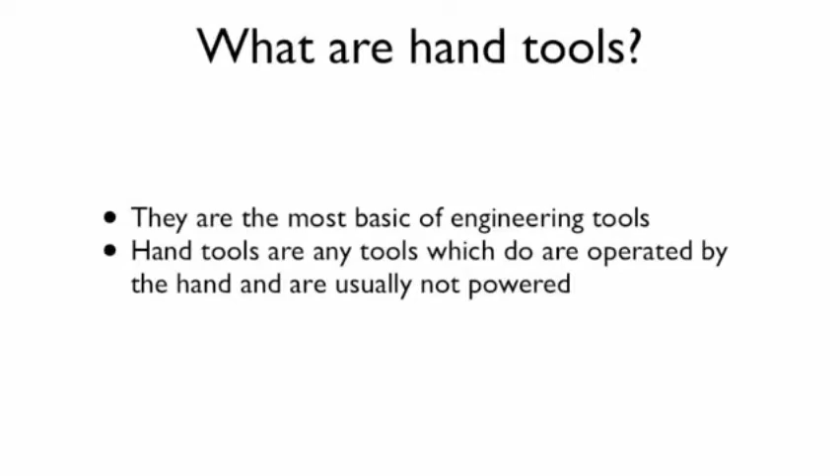Important operations. So hand tools, what are they? They're the most basic engineering tools. Anything you would use to build a design is basically a hand tool. Usually they're operated solely by your hands, but sometimes they can be powered. Usually hand tools are small devices as well. And always remember, safety is top priority. You can hurt yourself just as much using a hand tool as you can using a larger manufacturing tool.

So let's talk about many different types of tools. I'm going to start with pliers. Pliers are one of the most useful tools you'll use because they enhance gripping potential. There are some places we maybe aren't able to get to very easily, or we just don't have enough power to grab onto these places.

The first plier I want to look at is a long nose plier. Long nose pliers are extremely convenient for getting into narrow spaces where a hand simply can't fit, and also provide some extra gripping power and rigidity for grabbing certain devices. Also notice that near the pin joint of a long nose plier is a small black gap. This is often built into the long nose pliers as a cutting device used to cut wire.

The next type of plier is called a slip joint plier. A slip joint plier basically has a pin in the center, in the same place a long nose plier would between the handles and the actual jaws, but this allows the jaws of the pliers to spread out and fit to different surfaces. It's very similar to a channel lock plier. Essentially a channel lock plier is a type of slip joint plier, except it has bigger jaws, a little different orientation on how the tool is put together, and it can spread the jaws at a wider angle and wider distance apart.

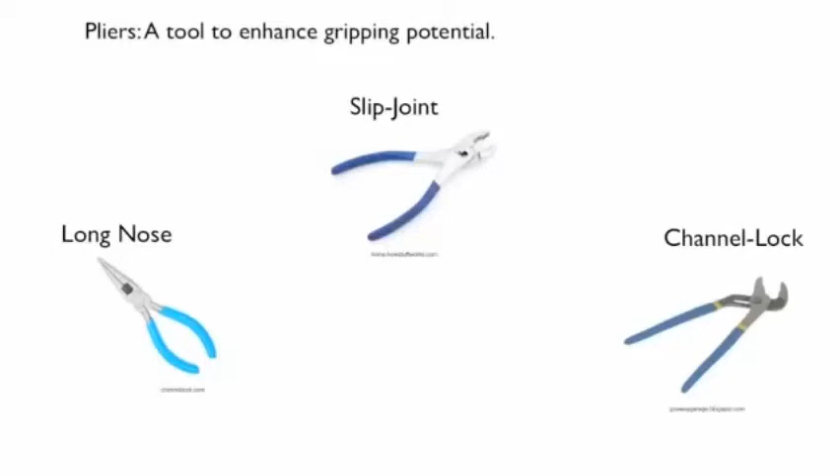There are many other types of pliers, but these are just some of the basic ones you should be familiar with. The second type of tool we're going to look at are called vice grips.

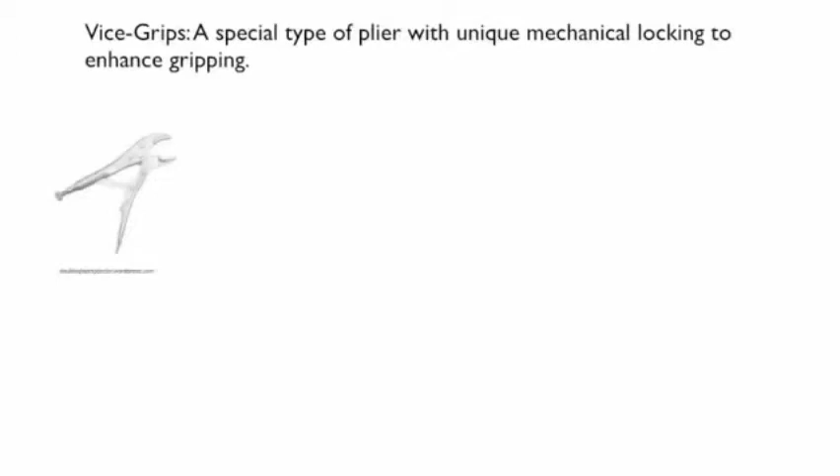Vice grips are a very unique type of plier. The main difference is vice grips have a certain mechanical advantage. If you look at the picture to the left, it shows vice grips in an open position. The next picture shows the vice grips in a closed position. The advantage of vice grips is you can adjust them using the small round screw, as you can see on the vice grips, to be able to clamp onto a material.

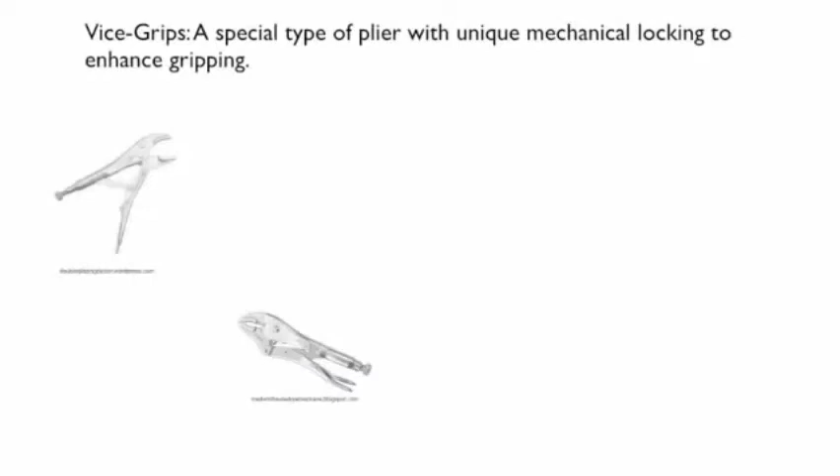And the nice thing about them is they will lock in place, making it so your hand doesn't have to provide a mechanical force to actually grip a tool. Vice grips come in many different shapes and sizes. Unlike the size you see to the left, where it has jaws with teeth, you can see vice grips with small flat surfaces to get around other objects but still make a pinching force.

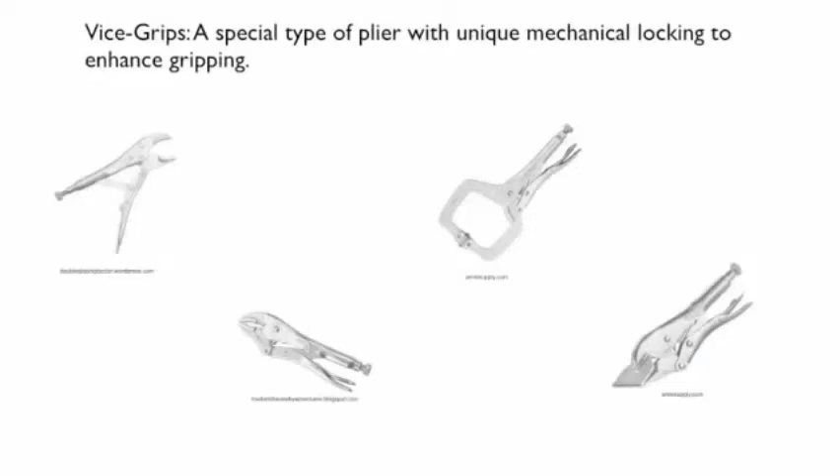And you can see sometimes jaws or vice grips with flat surfaces, as the one shown to the right. This kind of vice grip is useful for large flat areas of metal, or even if metal has been bent, these are very useful for flattening out that piece of metal as well.

The next tool we're going to look at are files, and specifically when we're working in the machine shop, we're dealing with metal files. You can see many examples of files on the left-hand side of the screen here. They come in a variety of different cross-sections depending on the operation you want to perform. But basically all files work about the same.

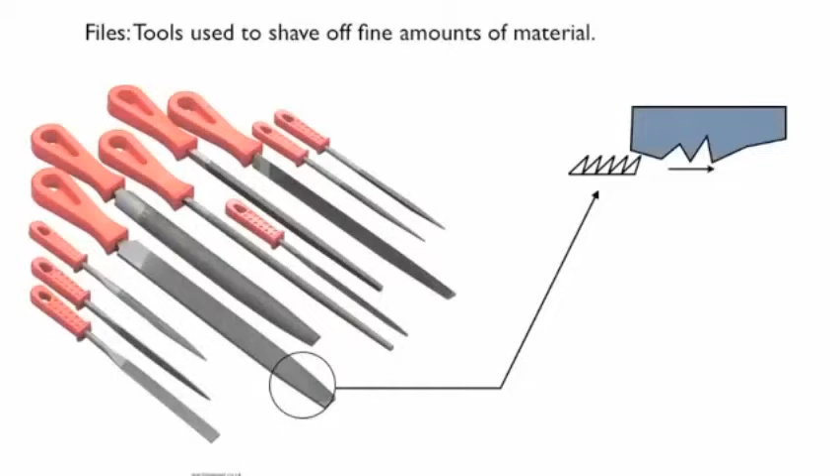If we look at the surface of the file, it has a fairly sharp surface pointed in one direction. If we're actually going to do a filing procedure, say for example we have a rough surface, we simply move the file in one direction along the surface and it smooths the surface out. Then, instead of going back on the surface, we bring the file back to the beginning of the surface and repeat the procedure again, each time removing more and more material.

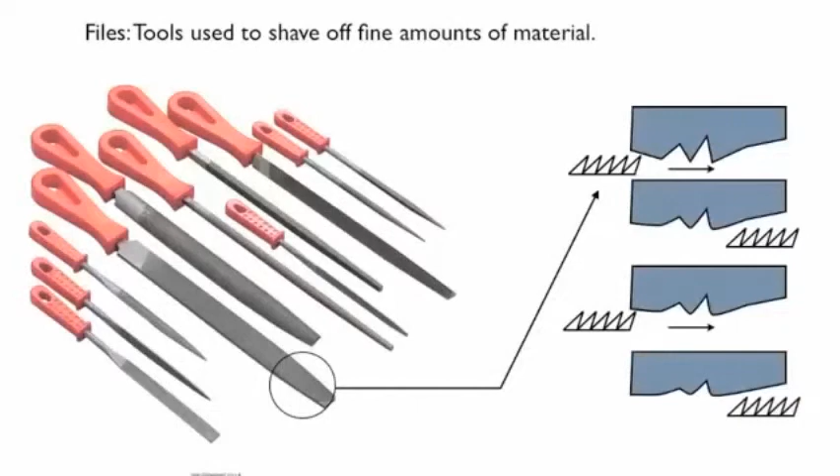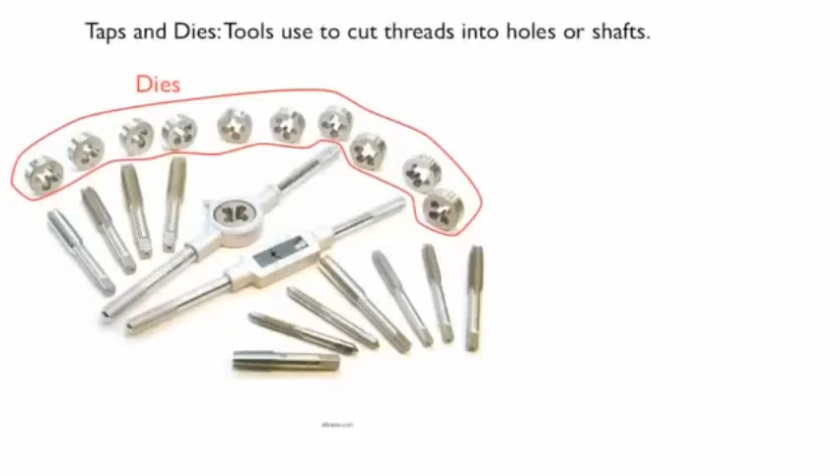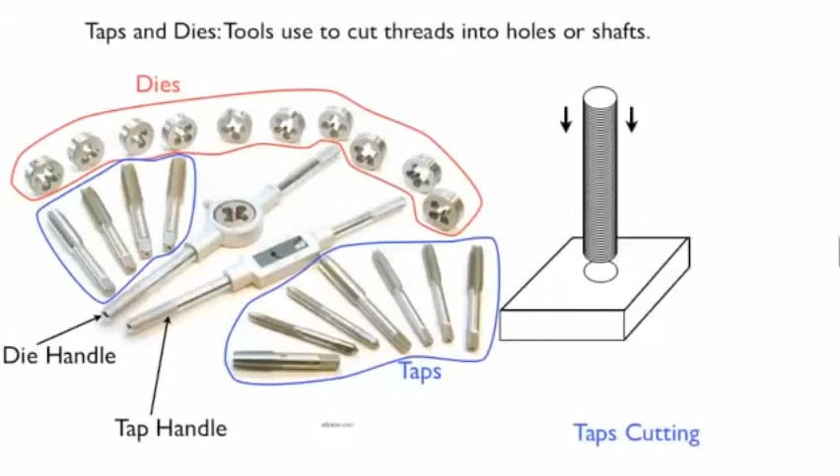And as we keep rotating around and move all the way down the post, we get a cut thread from the die. Taps work similarly in that they cut threads, but with a tap, we put a surface with a thread in it into a hole, and rotate it around, cutting threads the opposite way. Theoretically, you can take one member cut with a die and another cut with a tap, and mate them together.

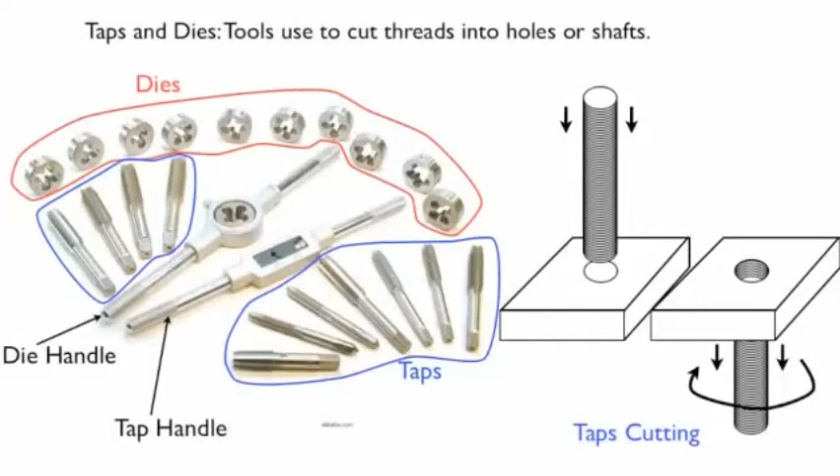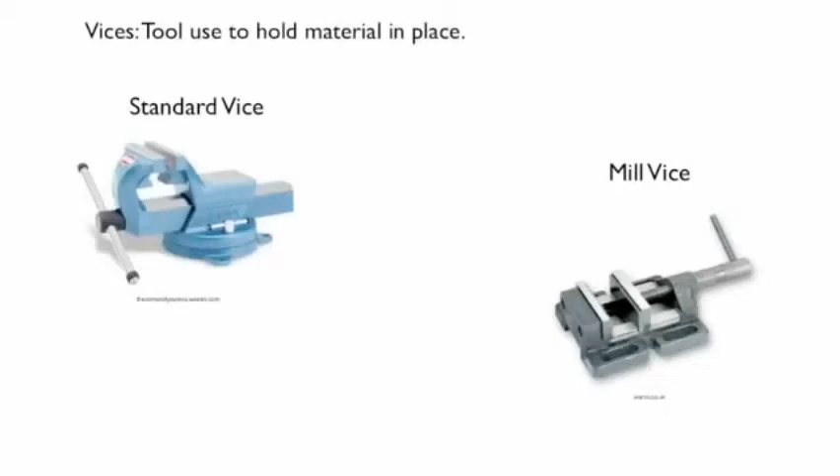Another tool we're going to look at is a vise. Vises are very useful because they provide a way of holding our work together so we can use tools on it. A standard vise is shown on the left, while a mill vise is shown on the right. When we talked a couple videos ago about drill presses, the mill vise was actually used in the drill press, and it's used in both a mill and a drill press. It's a special vise fit to that machine so we can set our material in it and perform operations.

Hammers are a tool I'm sure everybody has used. Hammers come in many different shapes and sizes. Basically, they're any kind of tool used to apply a blunt force on an object. Most likely they're used for nails, but also for other applications. A standard hammer is something everyone has probably used, mostly for nails.

A ball peen hammer is very much used in a machine shop, specifically to bend and form materials, and also to work on a mill, where we use it to make certain adjustments. A rubber hammer is very common and useful when we don't want to damage a material but still want to apply some force. And of course, an MC hammer, which hopefully everybody knows what that is.

Screwdrivers are used to attach fasteners. The two main types of fasteners are flathead and Phillips head screws. Flathead and Phillips type screwdrivers can be used on those screws, but there are many other types of screwdrivers depending on what type of screw you're trying to screw in. Screwdrivers come in many different shapes and sizes.

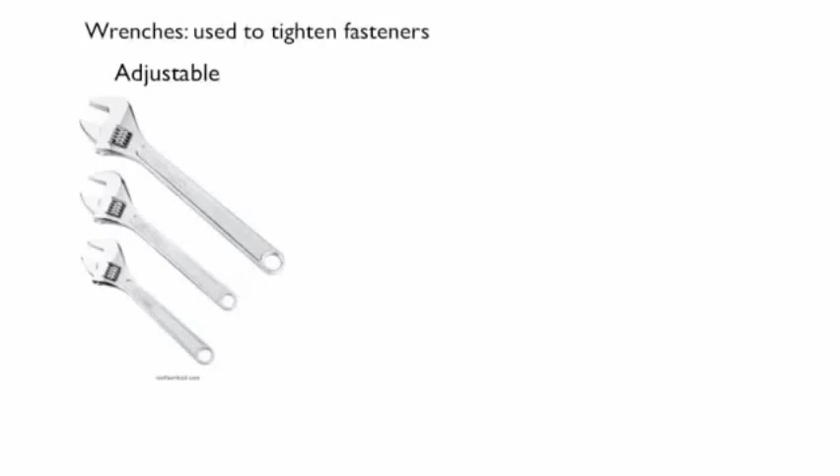Wrenches are used to tighten fasteners like screws. There are also many types of wrenches, like there are many types of screws: adjustable wrenches, crescent wrenches, and Allen wrenches. Adjustable wrenches and crescent wrenches are both used for hexagonal-shaped screws or bolts, while Allen wrenches are used for a very special type of screw or bolt.

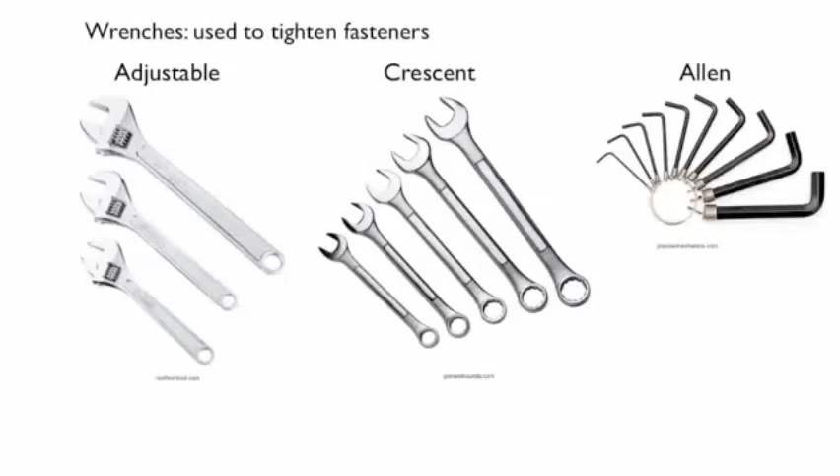And now, finally, we're going to talk about hand drills. Hand drills are what the center drills and every drill bit in the drill index are used for. So let's look at some of the basic anatomy of the drill.